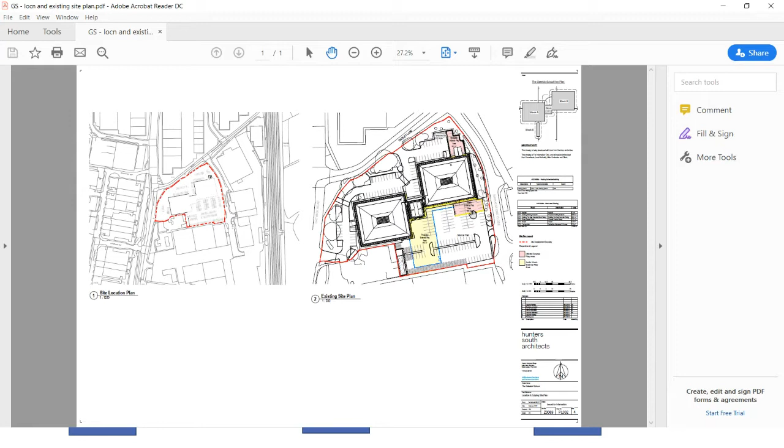This plan shows the general arrangements of the proposal, with access taken off Tinsley Lane North, with a one-way system that then exits onto Gatwick Road, and also a separate access from Wheatstone Road. Just to point out, the car parking spaces shown to the rear here are no longer proposed. That element does need to be updated from various plans, but a more detailed car parking layout plan will show that's no longer the case.

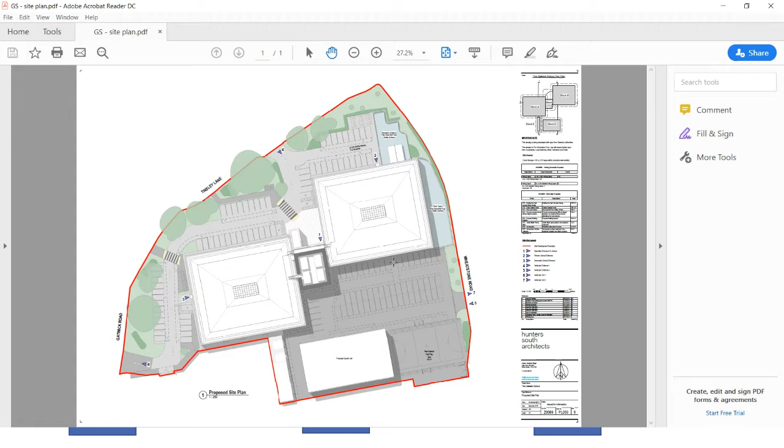Just to give a little bit of context to the application, the school opened in 2014 from these premises under permitted development rights and operated for a year. Then in 2015 we had the planning application for the full school for a permanent permission, but that was refused. Following that, there have been 2 temporary permissions granted to allow the school to operate for temporary periods with reduced numbers, to try and resolve the situation and see if there was a way forward with the proposals. Then in 2018 this current application was submitted, which is for the full school at its full complement, a maximum of 1,020 pupils, to be run on a permanent basis. Now turn to more detailed drawings.

So this is the ground floor plan. If we zoom in on the layout, this part of the building is the primary school or the primary entrance, arranged in a number of year classrooms from reception round to year 4, and also in the central section is the lower main hall. This then is the connecting building, which at ground floor level would be the dining hall.

And then the other building is primarily the secondary school. At ground floor level, you've got a number of rooms such as English and resistant materials, drama and dance, some toilet and changing rooms, and also an exhibition space and an upper main hall.

The application also proposes a small extension, which is this part here, and that's to provide a staircase to aid with accessibility around the premises, but also that will be a feature on the front elevation. When we get to the elevations, I'll run through that.

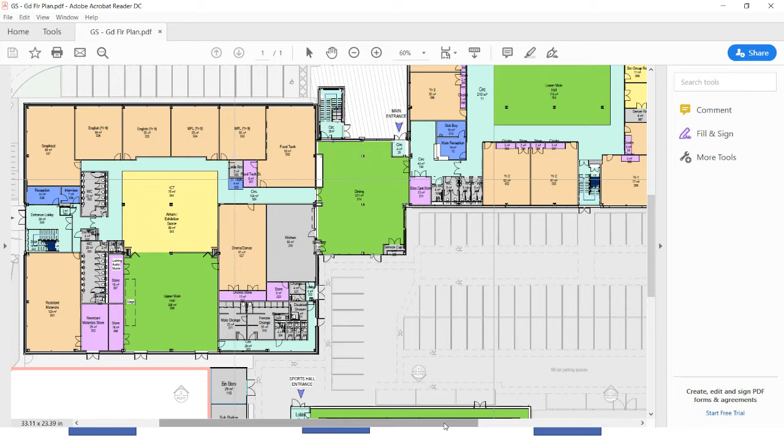Then to the rear of the site, a sports hall is proposed in this position here, and then also a new external hard play area, a Muga, a multi-use games area, and also some further courts in this position as well.

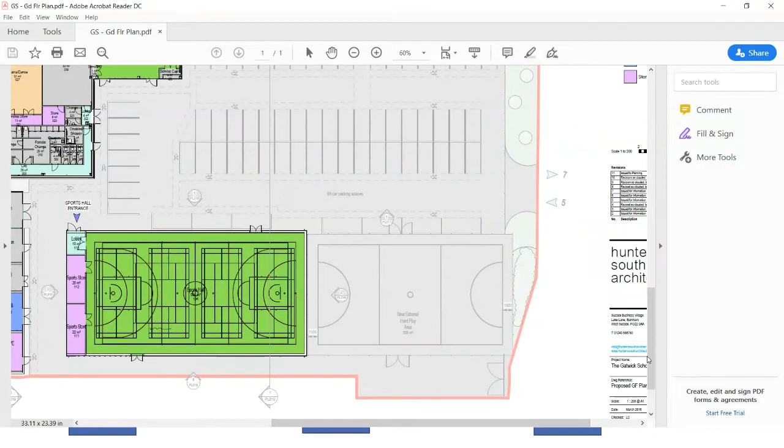And then finally, just to point out, there is an existing play area here for reception years, and then the early years would have a play area in this part of the site between the building and Wheatstone Road. And then the remainder of this rear area would be used for play purposes.

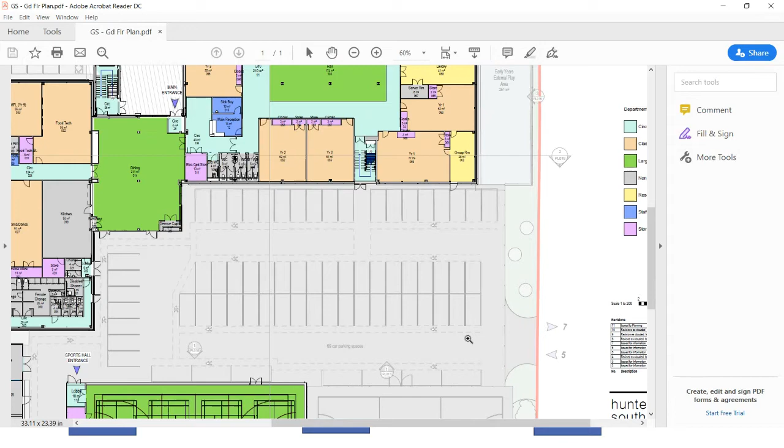Then the first floor plan just relates to the main school buildings. Again, this is year classrooms and then also subject classrooms, such as maths and science over in the secondary area. There's also a number of other rooms such as staff rooms, offices, special educational needs, an SEN therapy room here, and also in the link building, that would be the main library.

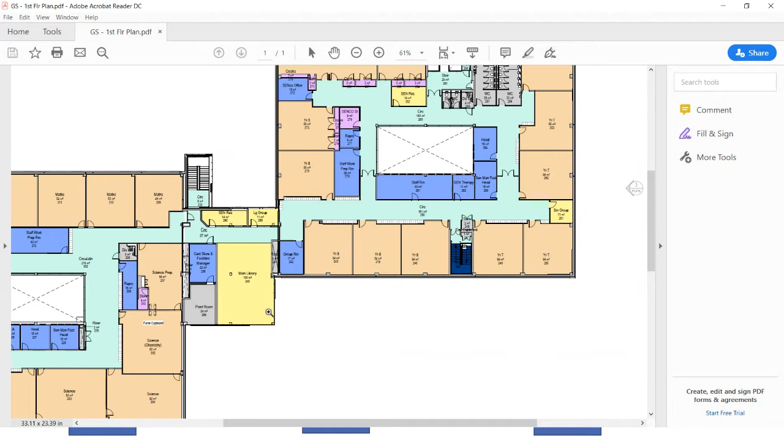Right, looking at the elevations, the north elevation, so this is viewed from Tinsley Lane North. The building is to be refurbished with new external cladding added in a blue colour scheme, sort of graduated bands of blue, which you can see on the elevations. This part here on the front elevation is the staircase that I mentioned, and then this would have a logo for the school. So the main school entrance would be here, and that's to accentuate that that's where the entrance would be.

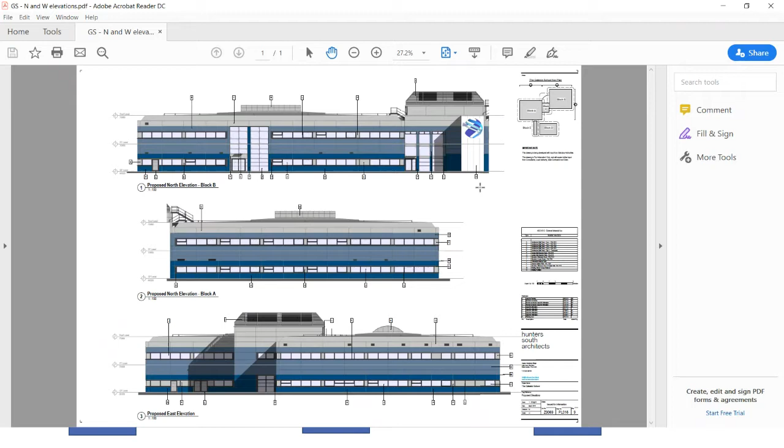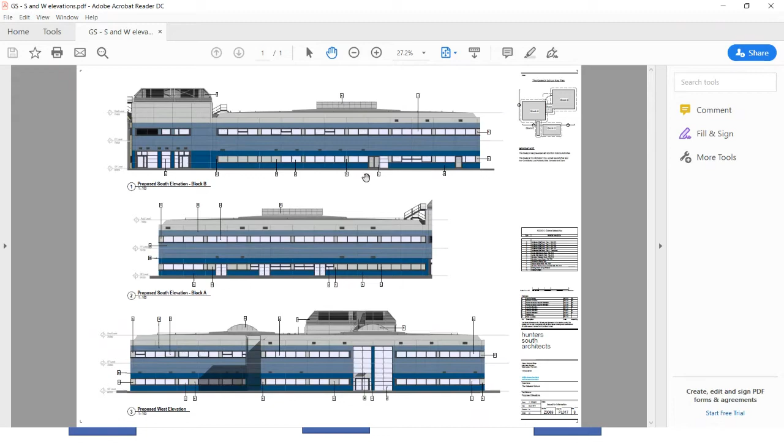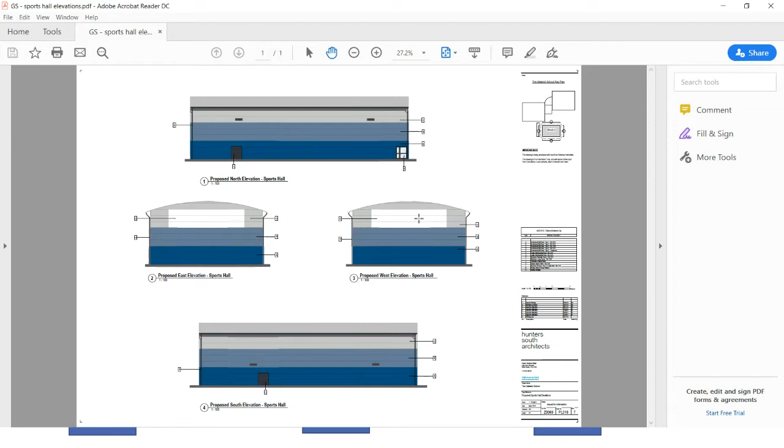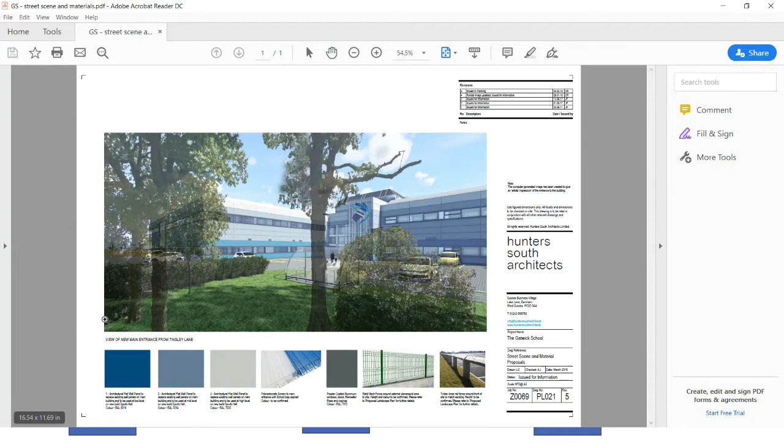Street scene elevation, so this is from the corner of Gatwick Road and Tinsley Lane North. You can see the new staircase feature with the logo for the school. I'll zoom in on that, shows some of the detailing of the materials, so they're the panels in the 3 shades of blue. The new staircases have a polycarbonate screen around it, so it just shows the various types of material.

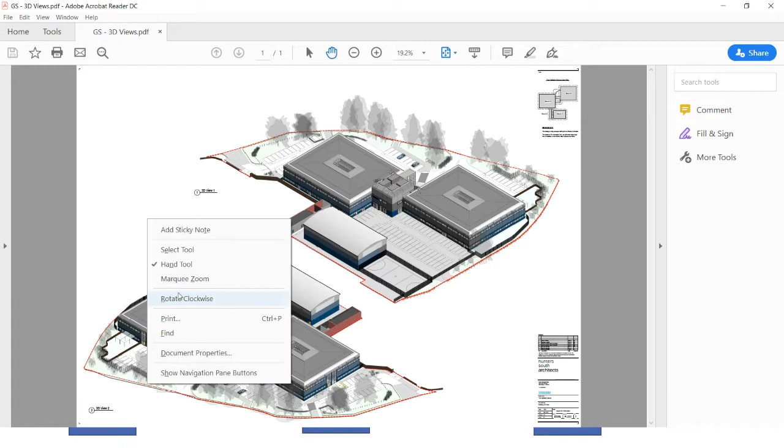And then some 3D views that have been prepared. So again, this is from Tinsley Lane North, just looking at a bird's eye view of it with the entrance feature here, the reception play area and the parking, the access through the site.

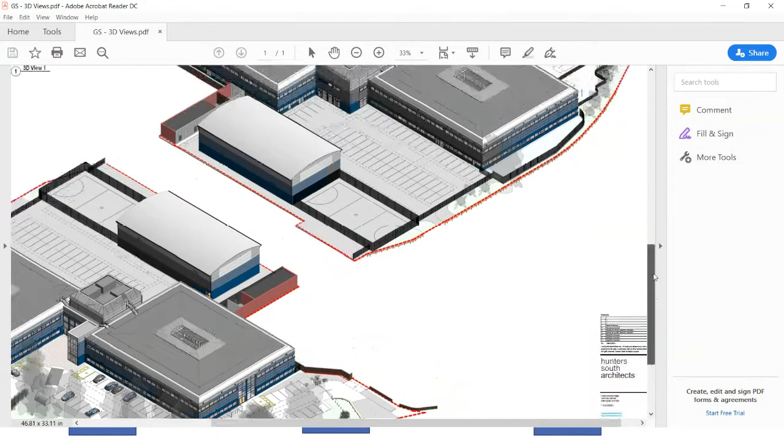And then looking at the rear view. So this is from Wheatstone Close with the sports hall here, and then the rear area of the school, and that would be the new play area at that point.

Also in regards to the play area, at the moment that's a sloping piece of ground, so it would need to be built up on a retaining wall, and we have a detail of that.

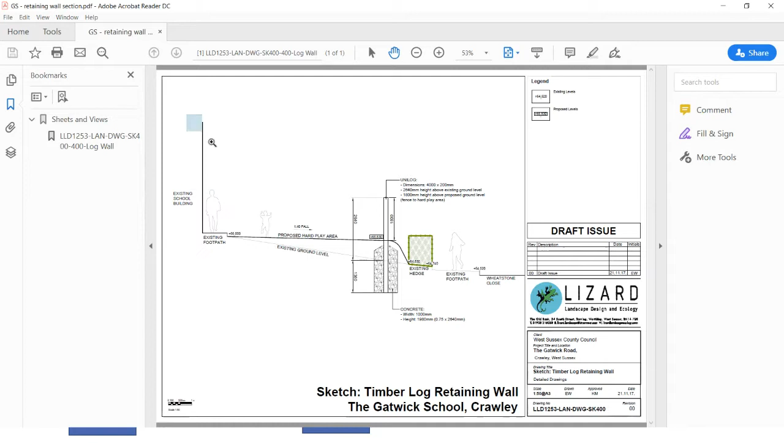I'll just zoom in on that. So you can see that's the school at the moment, then the ground level slopes down right down to the pavement, and then Wheatstone Close. That would need to be built up to be level, and then there would be a retaining boundary feature or boundary treatment. That does say Unilog, but actually in condition 14 the details of that boundary treatment would need to be submitted and approved.

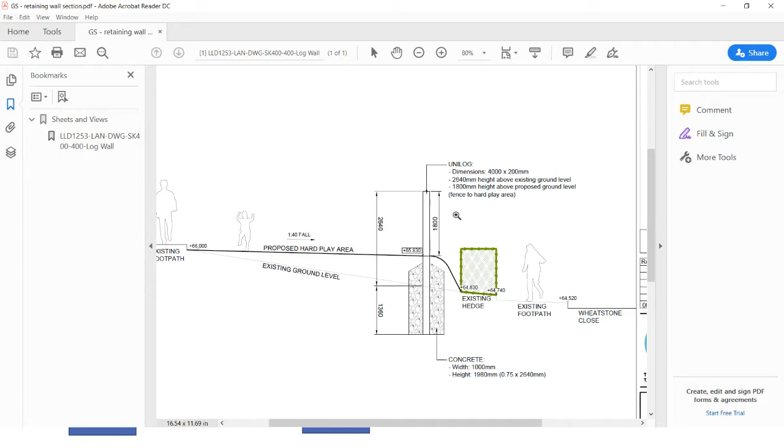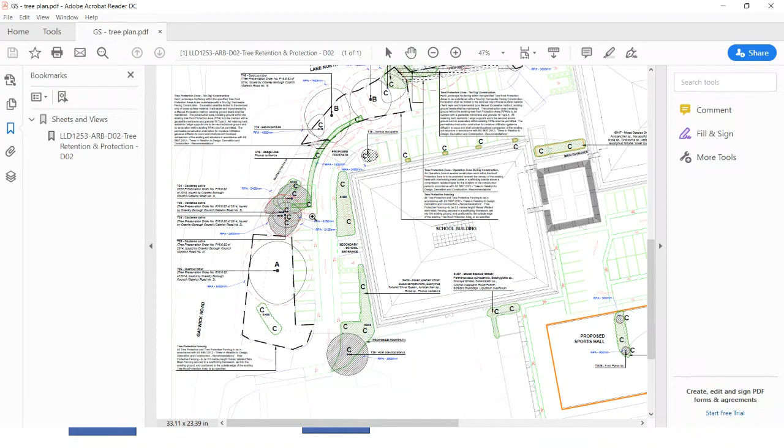There's a tree here, an acer, and there are also some immature trees in the rear area that would need to be removed to facilitate the sports hall and the MUGA. And the report sets out the mechanism to ensure that either replacement trees are planted on site and/or there is a contribution for the balance.

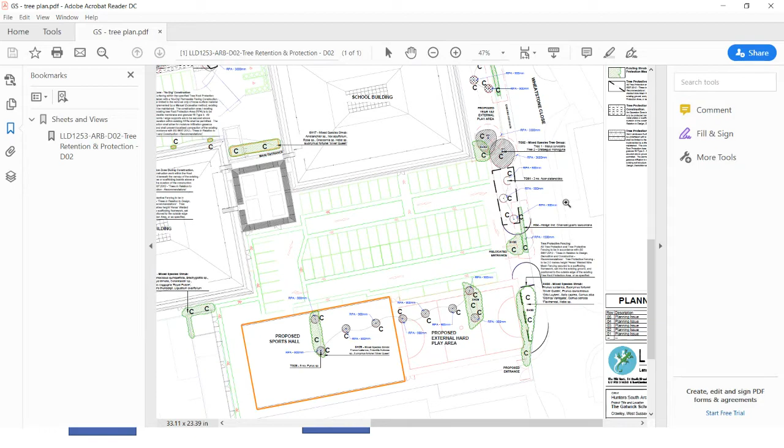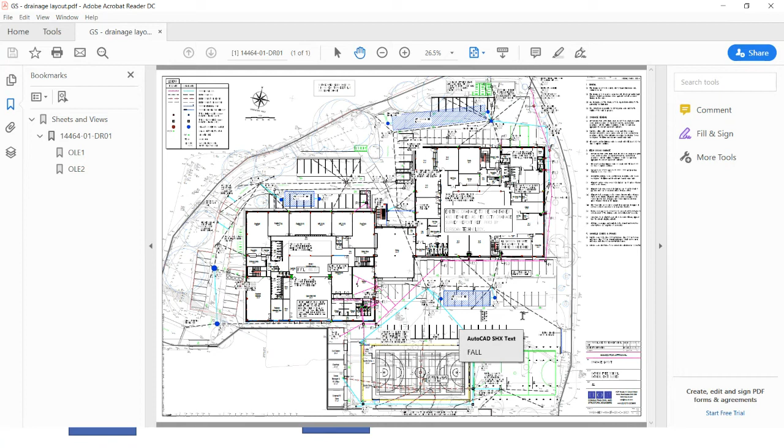In terms of drainage, there is to be a sustainable drainage system installed to deal with surface water runoff. Part of that would be 3 underground attenuation tanks, 2 at the front of the site and 1 in the rear, which would be covered by a condition to ensure it was undertaken. There's also a maintenance and management regime which would be undertaken by the school body.

As part of the documentation associated with the application, there is a car park management plan, and the next 2 slides are drawings from that plan, showing how car parking would work.

In the morning, parents would enter via Tinsley Lane North, and that would be a kiss and drop off arrangement taking 19 cars, then they would exit onto Gatwick Road, turning left.

There was concern about a potential conflict between cars and play areas and when it could be used, etc. As a result of the discussions, it was felt that was no longer needed other than this morning arrangement.

So that's the morning. Then for the afternoons, it would be pick up from the front car park, but actually parents are allowed to park in the bays because they would need to be waiting, ready for their children. That is 39 spaces.

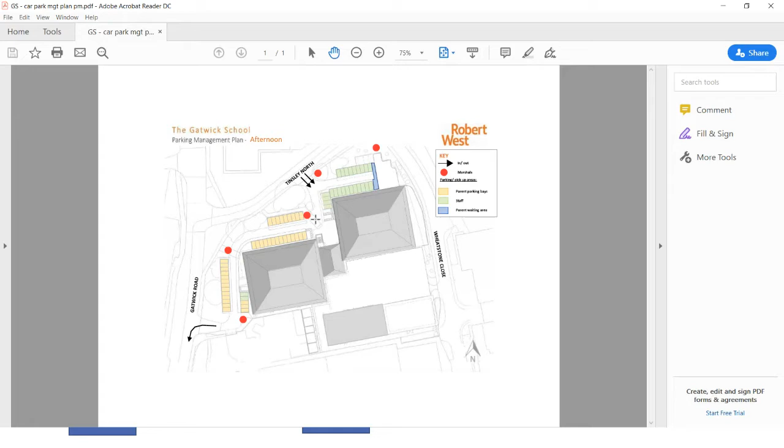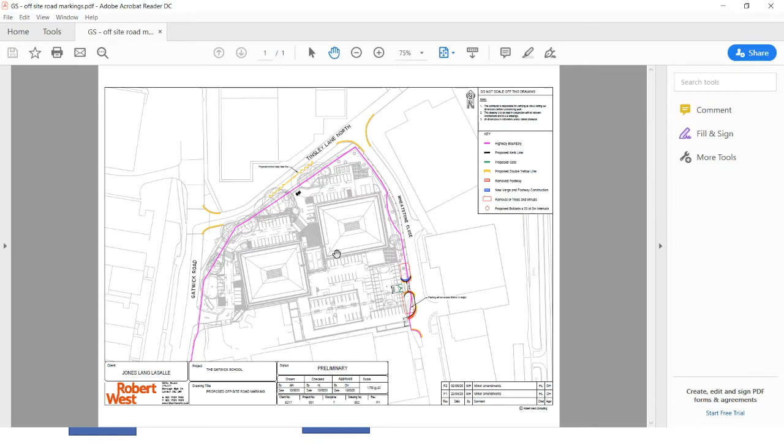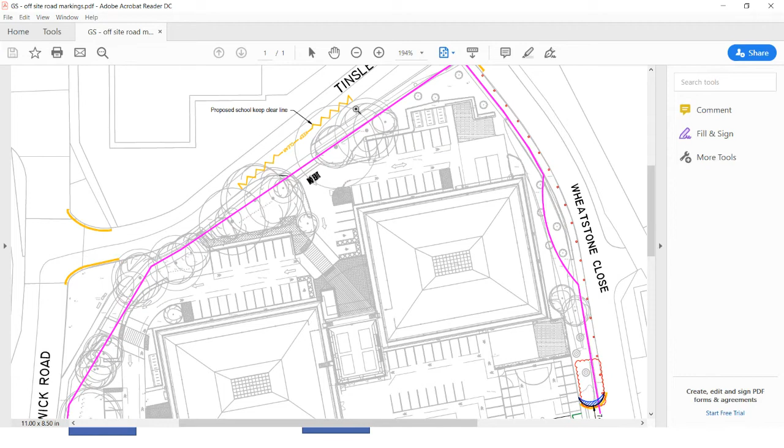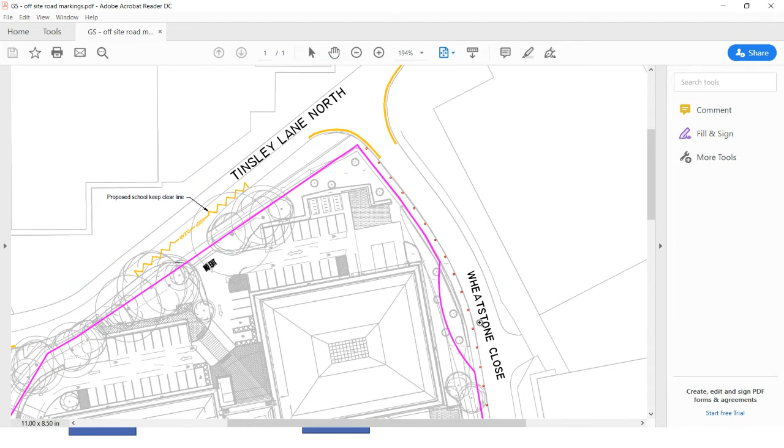As part of the proposals, the school are also putting forward a number of off-site road markings to facilitate access to the school. This is where we would have double yellow lines and school markings - let's zoom in on that. So double yellow lines on the junction there, the school keep clear lines here, along Wheatstone Close and Tinsley Lane North again, double yellow lines, and then bollards along this part of the pavement of Wheatstone Close, plus some changes to the access and road markings there.

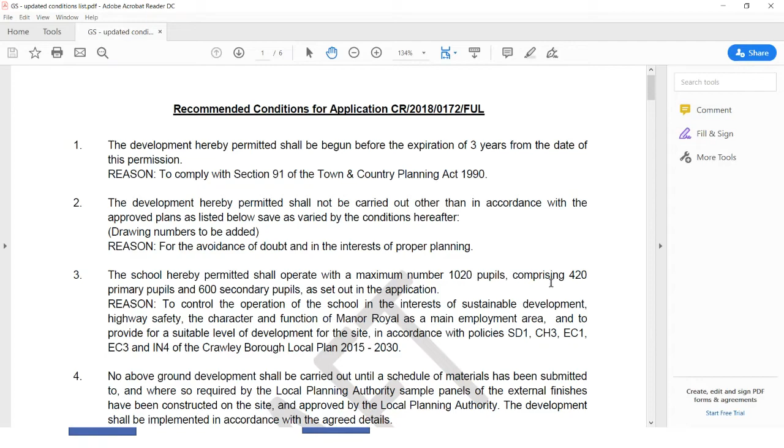A further update is in relation to conditions. So since the report was published, the applicant has had a chance to look at the conditions, and there have been some further discussions about them.

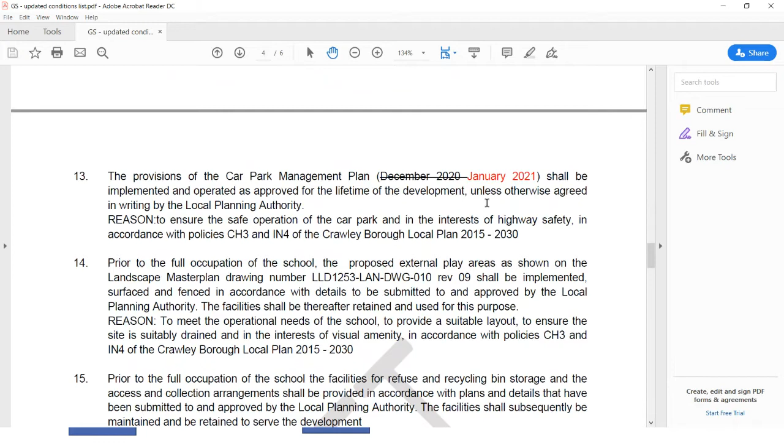Condition 13 relates to the updated car park management plan, which was received in January 21. Then condition 16 relates to the energy strategy, and it's been agreed between all the parties that actually those details need to be submitted prior to commencement of the sports hall development. So that wording has been amended.

To give an overview of the position, the local plan supports new educational facilities, and there is a need for additional school places in Crawley, and government policy gives significant weight to the establishment of state-funded schools.

In the light of that, and following the 2015 refusal for the application for the permanent school, it is necessary to look at those reasons for refusal and those concerns and see if they have changed, been addressed or been overcome.

The main area of concern has been the scale of the school in this location, and this does still remain an issue, particularly because this location is not a residential neighbourhood in the traditional Crawley sense, but is the main employment area of Manor Royal.

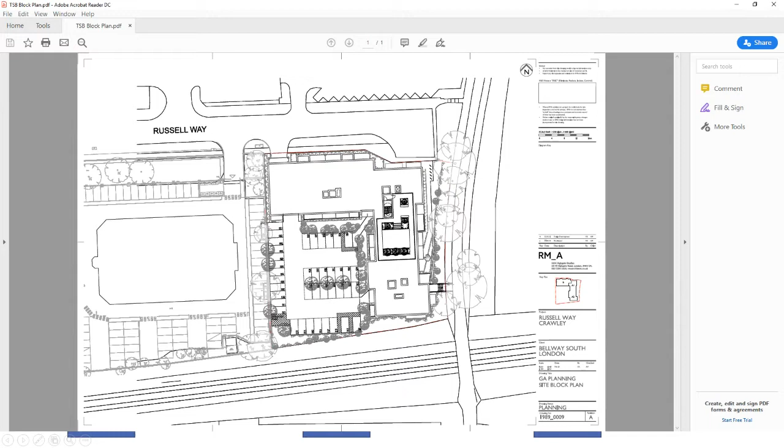The scheme during the course of the application has been amended through revisions to the design of the proposal, the internal layout of the proposed units, the housing mix by proposing 3-bed flats, provision of footway and other matters.

Local plan policy H2 identifies the site as a key deliverable housing site, and therefore the principle of residential development is considered acceptable. Regarding the design and appearance of the proposal and its impact on the visual amenity of the area, it is considered that the height, bulk and massing of the proposal is acceptable and would have a sympathetic relationship within the surrounding area, given the 4-story and 5-story buildings in the immediate street scene.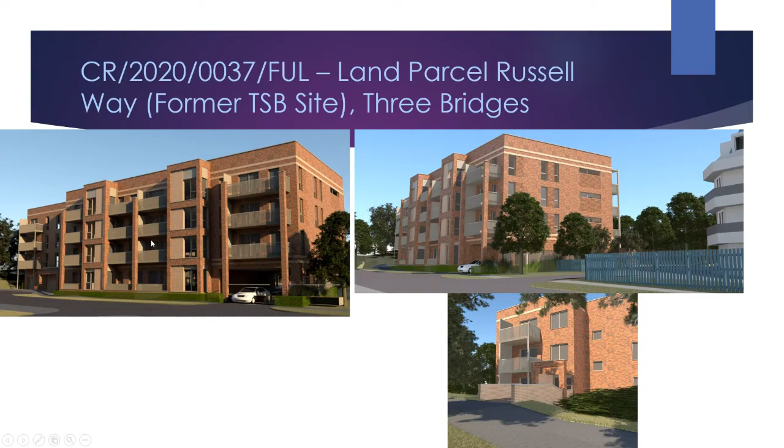In relation to the neighbouring amenities, the applicants have submitted a daylight and sunlight report in support of the application, which demonstrated that the impact on daylight and sunlight on the adjacent occupiers would be acceptable.

In addition, specifically in relation to the former EDF building to the west, where there are some habitable windows, it is considered that given the L-shaped building, the angled high-level windows on this elevation serving secondary rooms, and the straight window-to-window distances of more than 40 meters, the proposal would accord with the minimum distance requirements, including the urban design SPD, and would not result in harmful overlooking or loss of privacy to the occupiers of the former EDF building.

Regarding the living environment for the future occupiers, all the proposed units would meet the minimum space standards and would all have private balconies in accordance with the requirements included in the urban design SPD. A communal amenity area would also be provided as a rooftop terrace. The proposed development, as amended with some internal alterations to the layout of the units, is considered to provide an acceptable living environment in terms of light and outlook.

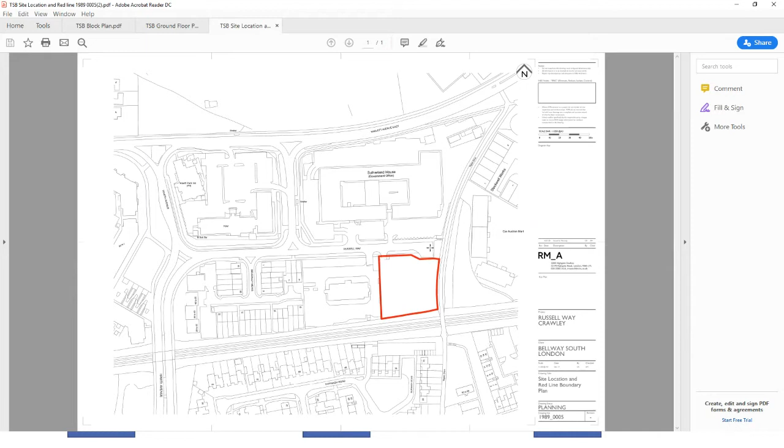The proposal would also include motorcycle parking, and it would include several cycle spaces within the footprint of the building, and under the undercroft. All of these, the cycle spaces and motorcycle parking, will comply with the council's minimum standards. Given all this, it is considered that travel by bus, rail, foot and cycle could reasonably be utilised by residents of the new development, therefore reducing reliance on private car.

Therefore, officers consider that the shortfall of between 29 and 42 car parking spaces is, on balance, acceptable. Conditions are recommended in relation to car and cycle parking and a construction management plan. Highway modification works in relation to the pedestrian element and the drop curb, and the final version of the travel plan, are recommended to be secured via legal agreement.

Furthermore, the application site contains some trees along the east, west and southern boundaries. 10 of these trees are proposed to be removed. All these are category C trees, and the council's tree officer raised no objection to the proposed removal of these trees, and considered that the retained trees, in close proximity to the structural landscaping, can be protected throughout the development with no significant future impact post-development.

Hopefully you can actually see the site now rather than me carrying on without it. The red line site here indicates the full extent of the application site, which is the playing fields on Breezehurst Drive. To the east of the site here we have Meridian Crescent. To the north, Waterfall Crescent, Dowster Crescent, and the Breezehurst Community Pavilion is up in this corner. Dowster Brook runs along the western boundary, and to the south along here is the A220 Horsham Road. There's a line of trees running along this southern boundary, and also along here where the brook is.

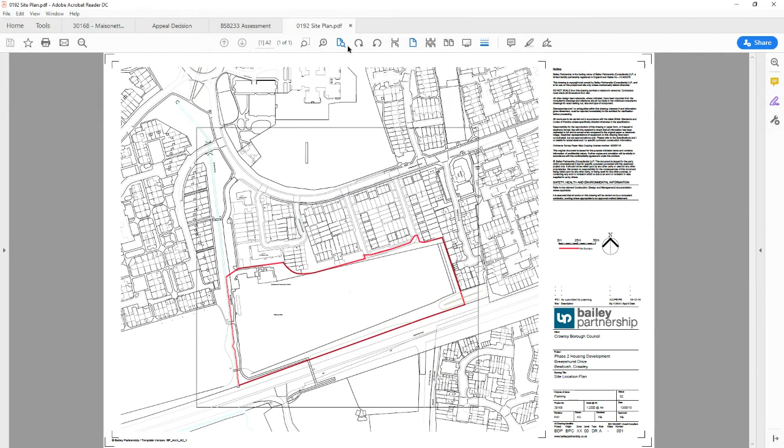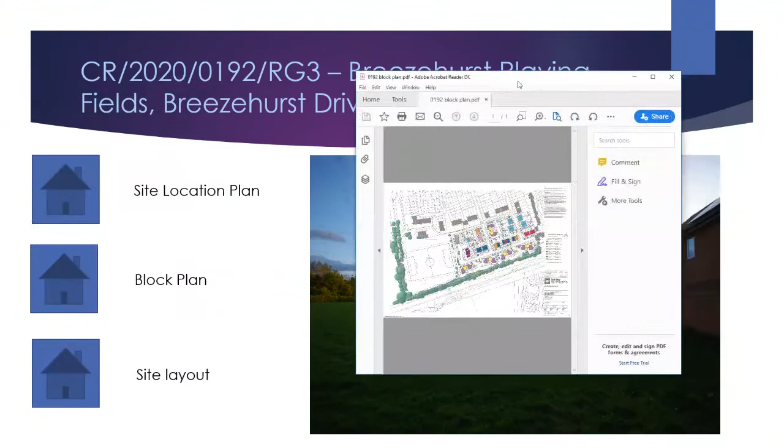So the site would be developed in two distinct parts. About two-thirds of the site towards the east would be for housing, with the retained playing pitch associated with Breezehurst Community Pavilion to the west, as indicated here. The development would comprise a mixture of semi-detached houses and a short terrace of 3 houses, predominantly located where we've got these dark blue, light blue, pink, and orange areas. The purple and yellow areas are where the 3-storey blocks of flats would be located, and the light purple and darker purple areas are blocks of up to 3-storey maisonettes.

The development itself would continue the road from Waterfall Crescent, which would come down and be altered here to reduce speeds going around the corner. It would come round in a U-shape with an access off to the flats and maisonettes at the western end. The roads would also include areas of road calming, such as here where it's narrowed with a raised platform, and here, and also raised road narrowing and a platform along the southern access road between the houses and the main blocks of flats.

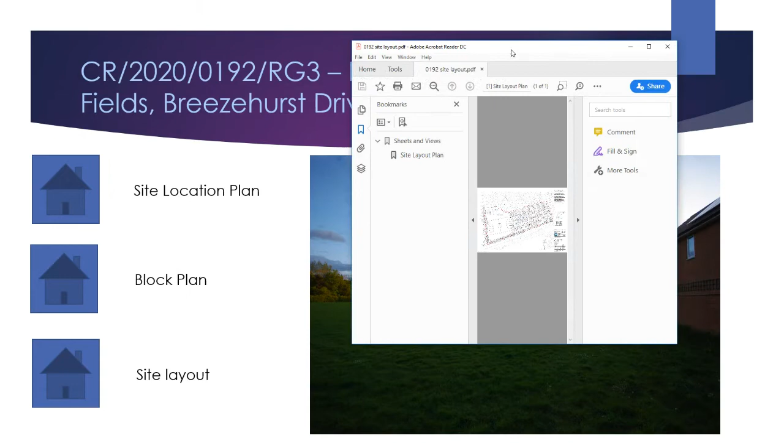So the buildings to the south here would be three stories, predominantly with windows facing the northwest and northeast, with very limited openings to the south. The thick lines indicated here and in between the flats, so here and here the bin storage, along here and locations around here and here, would be 3-metre high noise attenuating brick walls.

Part of the development here would involve the excavation of part of the bund, and this is where a few of those trees would be lost in this area. The location of this element of the development here along the south would result in loss of the hedge that currently runs along this part of the site.

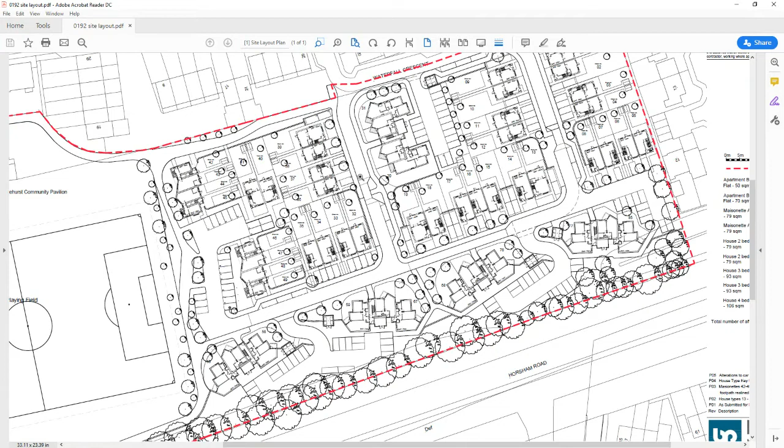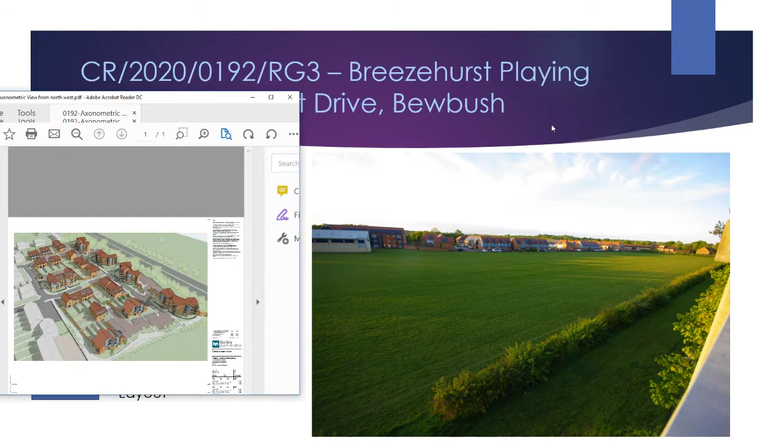So to give an indication of the sort of overall form of the development, I thought it'd be easier to view it in this axonometric drawing, which shows the development in 3D. So as you can see, the 2-storey houses are located close to the existing 2-storey houses, except for this block here of this 3-storey block of flats, and they run up the main route from Waterfall Crescent here, turning round.

So these are in this location. You can see the indication of the flats with all the different angles and different roof forms as well. Now the angles of the building have two purposes. One is to aid in the noise attenuation for the habitable windows that face to the north, northeast and northwest, and they also add interest to the buildings, which are a fairly substantial size, being 3-storey.

These two buildings to the front here facing onto the playing fields are the maisonette blocks. They have slightly more bulk and massing than the houses, but they are 2-storey where they face the houses on Dowster Crescent here, and they rise to 3-storey in the middle. You can also see indications of where the parking would be, and this axonometric drawing also helps to clearly see where these sound attenuating walls would be in between the blocks of the building.

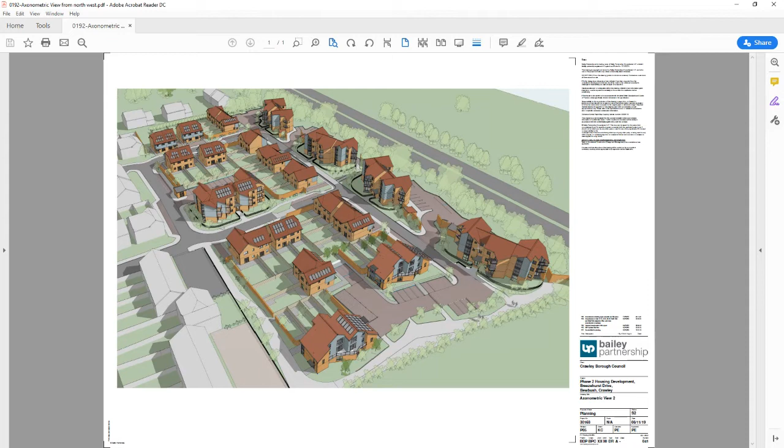So the design of the units is considered sympathetic to the existing houses. As we saw from the photograph earlier, the houses are of a fairly similar design. They again would be brick to match the houses that we have here. The flats would be a more contemporary design as meets their more prominent location at the end of roads.

So this just shows effectively the proposed development from the southwestern corner. You can see the relationship between those houses facing the site to the north as they face onto the south. Again, the specific details of relationship between individual units is set out in the report, so I don't intend to go into any detail. But on the basis of what's been set out, this is considered it would not have a harmful impact on the amenities of existing residents.

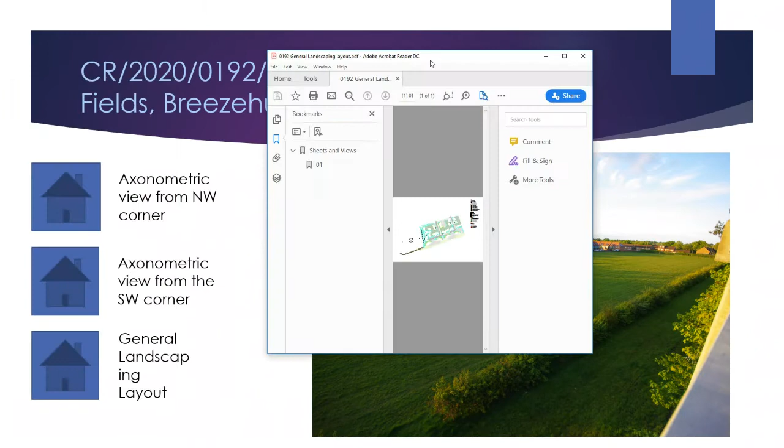So this drawing is provided to illustrate the areas of landscaping provided, which includes amenity areas for the flats, gardens, indicated in light blue and green. The darker green are the private amenity spaces for the individual units. The proposal also demonstrates where trees can be accommodated on site, so that both the number of housing units are provided with trees, 85, plus there's space within the site overall to replace trees that would be lost due to the development going in.

As the site also includes a much larger area, because it includes the playing field over here at the western end, there's potentially scope for a bit more planting in these areas too. As you can see, the tree line along the southern boundary here would be retained. This is structural landscaping, also effectively important in terms of its context with countryside, because it screens the whole of this site from the countryside, and Horsham district here on the other side.

of the A264 Horsham Road. The level of separation, rotation, and the retention of the structural landscaping here, and the potential for it to be reinforced by additional planting, means this is not considered to have a harmful impact on the countryside, particularly when the playing fields closer that have a much more direct relationship to the footbridge where people would mostly see the site from, is over here at the western end of the site.

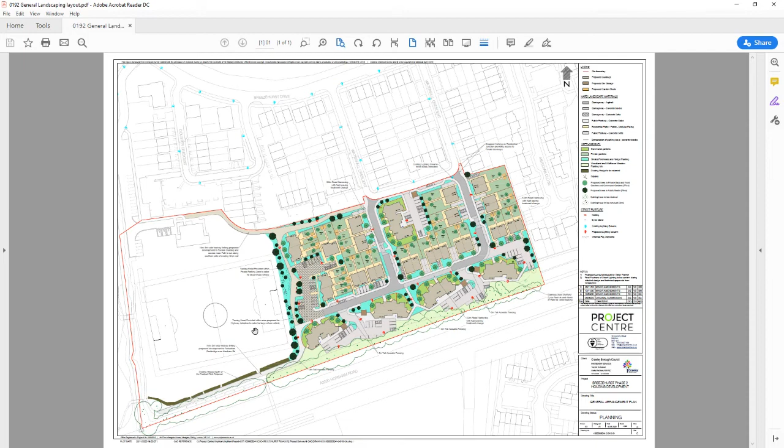This shows the houses that faced onto the site. As you can see, there's a railing here with some parked cars. So the whole intention is not to create this narrow alleyway that residents are worried about, and the local planning authority clearly shares that concern - that if it was a narrow alleyway, it would not be a good environment for people to be in and be less secure. But with the number of overlooking windows already, plus the additional ones, and the width of it with a little bit of planting, it's considered this would be an attractive feature for pedestrians and cyclists to use.

I'm hoping I've addressed Councillor Jaggard's question on the Sport England objections. It may be I just haven't updated the website with their comments - they came in relatively recently, formally, and I think I will update those. But yes, they have withdrawn their objection subject to the conditions and the Section 106 agreement.

On the concerns relating to the loss of the playing field more generally, it has been identified that Bewbush effectively has a good provision of sports playing fields, but has a shortage in terms of quality. There is Skelmersdale Walk immediately to the west of this site. This is within H2 and the design brief for it. This site is considered to be excess to what is required for Bewbush, subject to ensuring an improvement of the retained facilities to make them more usable.

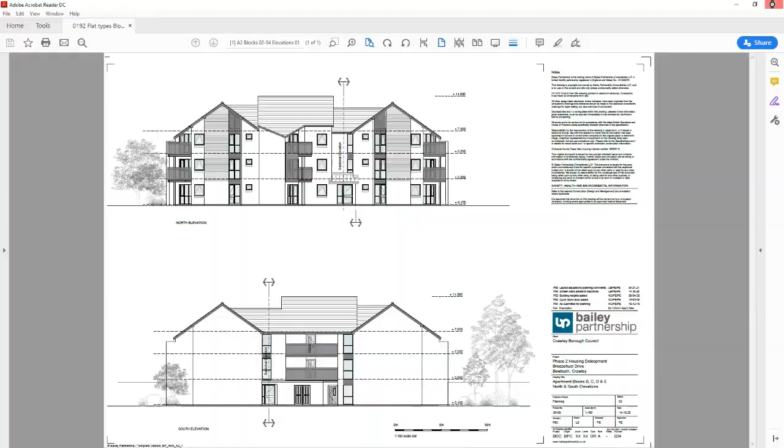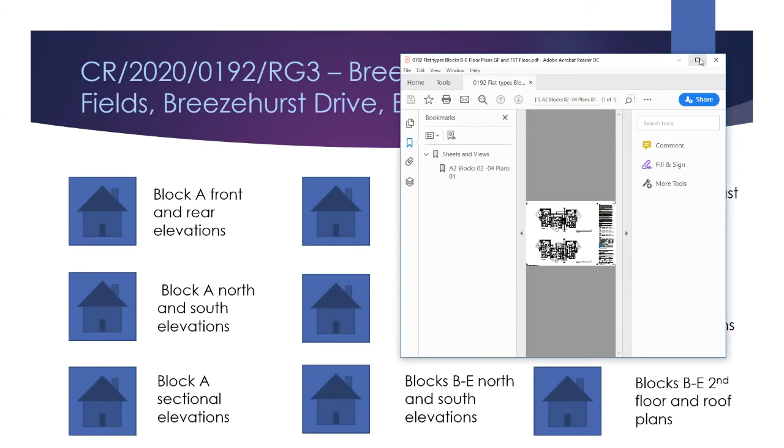So just as an example, as we saw, there's a doorway here opening into the hallway, and effectively a window for a bathroom - that is the extent of what's facing there. Living spaces are to the north, away from where the noise is coming from. It's the same here - the outlook is for these to the north, side facing kitchen windows, and again bedrooms to the front here with their own windows and outlook.

So again, the smaller windows here are for the bathroom. Yes, it's a design solution that both provides, we consider, an adequate living environment for the residents and protects the other residents in the housing and the other flats further to north. It also helps to protect them from noise when they're using their gardens and those amenity spaces.

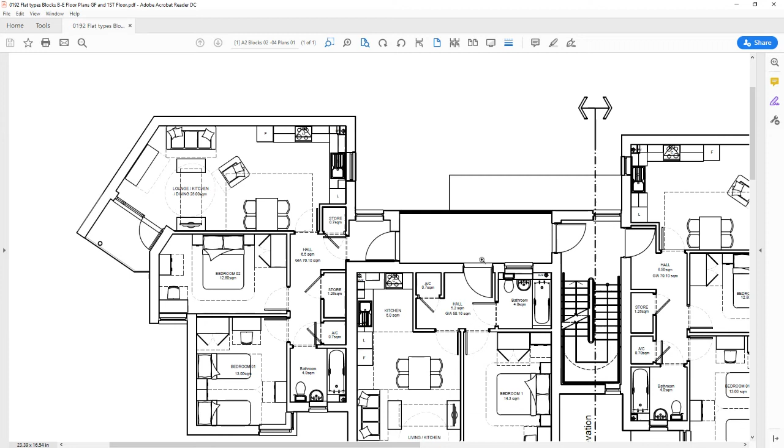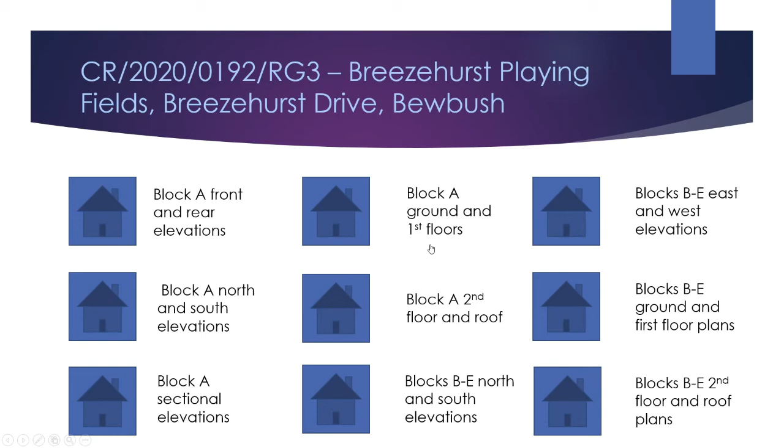I'm hoping that answers that query. There was a question relating to noise, dust, etc., and Councillor Pickett is quite right to pick up that strictly speaking, these are not planning matters - they are covered by the Environmental Protection Act, which is generally administered by our environmental health colleagues. However, this particular development does include a requirement for a construction management plan, and the aims of that are to help reduce these elements as well, so that environmental health will hopefully not have to invoke elements of the Environmental Protection Act. There's also, I think, a condition relating specifically to dust suppression.

The other elements included in this is also one of the reasons for not being able to have the playing field immediately adjacent to the site improved at the same time that the building works are going on for the development - it's proposed that the haul route for large vehicles will come from to the west of the Breezehurst Community Pavilion and then across some of the grass into the site, to avoid those large vehicles and the potential impact they would have on existing residents.

Councillor Maguire raised a concern about the loss of the open space and the potential that this would set a precedent for building on other open space. That is not the case. This site has been specifically identified here in Bewbush as an area where there is good provision of this type of open space - it's just limited in its quality. This certainly does not apply to all the other open spaces within the town, and each of those will be viewed on its own merits, and this would not in any way set a precedence for those to be brought forward for development.

I'm hoping that's answered all the queries. Oh, Councillor Jaggard just asked the query about the expiration date. Effectively, the application - it's passed, it's a statutory 13-week time for determination. There have been past agreements with the applicant to extend the time in order to get amended plans, and additional information has been required during the course of the application, and that's effectively what it means by having expired. It's just that going past its 13-week statutory determination date, after which the applicant effectively has the right of appeal, but they've been working with the local planning authority to improve the development so that we could bring it to committee. Thank you.

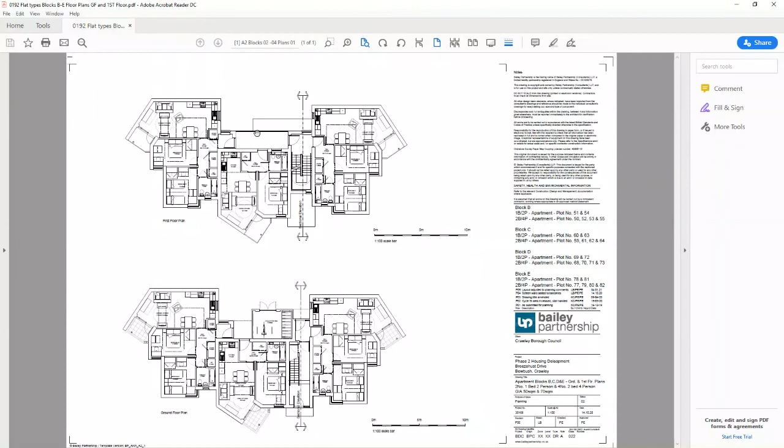I'm hoping they're displaying on the system now. Yes, we can see those.

Excellent. Just to show, with these areas here, for example, the kitchen to the rear is set towards the back, but the living space is here with the door and window facing onto the balcony, facing effectively to the northwest. Bedroom windows, again windows here.

So the rooms are effectively not going to be dual aspect because of this need to limit the openings on that south side facing, but they have been designed so that they do have reasonable light coming into them, and an outlook from a relatively reasonable opening. Some of these are kind of L-shaped round the corner.

The bedroom here does have a window. It's not perfect, but the constraints of the site and the noise are such. There would be these secondary windows into these areas here.

Now, whether they're opening or not is going to be subject to detailed consideration when we look at the noise attenuation measures that would be agreed with environmental health. But I very much doubt if they're going to be opening, because as we noticed, the road to the south is noisy, and if they were opening, I believe it would be likely to cause an issue.

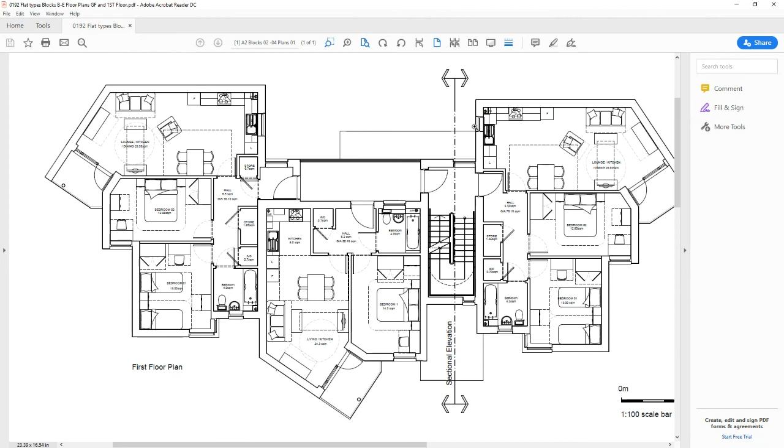Now, in relation to the electric vehicle charging points, the applicant is intending to provide electrical vehicle charging points for all of the houses. Each of the new houses being built, I think individually, is going to have at least one point allocated with it, and it's anticipated to provide 20% in the other shared areas.

What I can say at the moment is that effectively the council is the applicant, and the council will be managing this for these communal areas, and therefore we're not in a position here to answer exactly how those are going to be allocated, but it would be 20% within each of those shared parking areas that are being provided, so that they're spread around the site rather than all being in one location.

The applicant is proposing to install the infrastructure so that electric vehicle charging points can potentially be provided in every parking space on the site, even though this is not a requirement that we can actually insist that they do at this time. So hopefully that answers a little bit more about what the council is hoping, as the applicant, is going to do in relation to those electrical vehicle charging points.